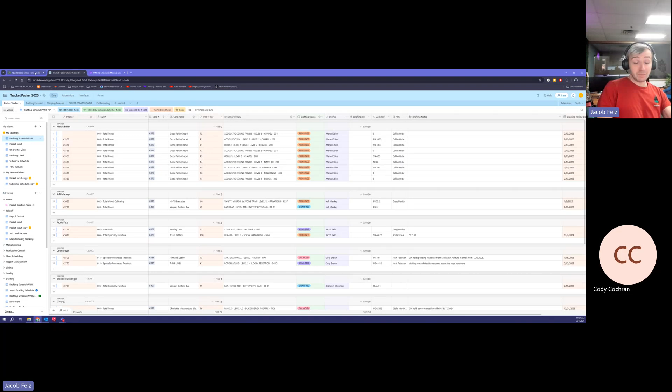All right. Well, I got some cool stuff that Greg was able to fish out of the metal vendor for the staircase, so we'll be looking at that in just a moment. If you want, because you are training, I would just go into indirect and say that you're training on stairs for today. I'm going to sign into the staircase since it's got my name on it. If it's in T sheets, I'll clock into it. It's 45719. Boom. Already done.

Oh, we're on stairs now. That's actually that thing you guys drew the other day, the faceted panel thing. You can't really tell because the picture's really zoomed in, but that's what that is. Bradley Law. Looks like a drawer. Yeah, those things actually did have drawers on one side of them, which is kind of cool.

All right. So this staircase is on level 19 of Bradley Law. Bradley Law is project 6358 if you did want to sync it for anything. We're going to take a look at the architecture. You said 6358? Yeah. I might already be synced. Oh yeah, you probably do have this one synced because I think you did some changes to it. 6358, Bradley Law.

Oh, 19th floor, that's right. Because you guys just did all the cabinets for that one, just earlier this week, believe it or not. Okay. So there's one thing that's a little bit wishy-washy at this point. There's a planter, they call it a plinth planter. It's got multiple names. Underneath the staircase, there is something there that is kind of undefined at this point.

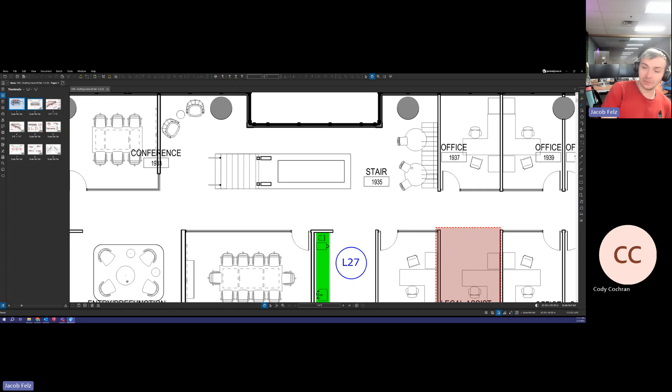And that's just kind of a necessary thing these days, which is kind of cool. It makes the stairs look even neater anyway if they have something like that. But it also serves a really good purpose too, to make sure that people don't get injured while walking through this building.

So the architect actually didn't really draw much of anything for that staircase, but fortunately, and this is something that typically we're going to do every time we draw a staircase, we will request the steel vendor's CAD drawings or their metal shop drawings for their construction of their stairs. Because when we do staircases, we very seldom actually do anything that we have to make structurally sound on our end. We usually are cladding some kind of a metal structure.

So I would say practically 100% of the time. There's one staircase we've done in the history of on-site that I'm aware of that wasn't like that, and we're still fighting it. It's a big deal. Dang. You've got to get it stamped by a structural engineer, which we kind of talked about the other day. It costs a lot of money to have somebody do that. Plus, it's a real pain. It has to be inspected. It has to meet a bunch of code.

So a lot of times when you see a staircase on a job, really what we're doing is we're essentially decorating the steel, if you want to call it that. We're cladding over what the steel vendor has provided. And that is the case in this staircase as well. So

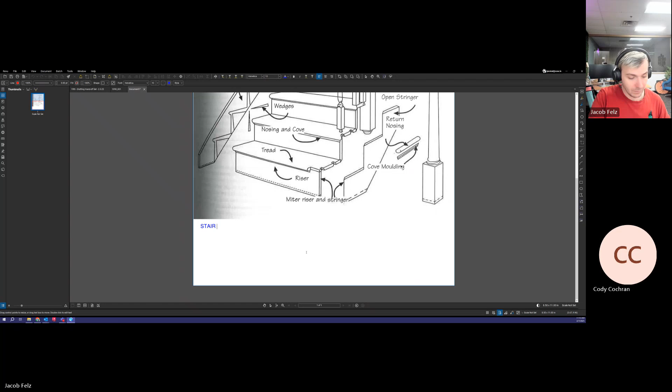Their terminology 101. All right. So, all right. Here we go. All right.

So the type of stairs that we're used to seeing, we do get a lot of the same types of verbiage. Like the side of your staircase, you usually will have what's called a stringer. A stringer is just a sort of diagonal member that actually goes along the side of the steps. Sometimes you might have one that's in the dead center too. So if you do, it's no big deal, but that would also be considered a stringer too. It would just be like a center stringer.

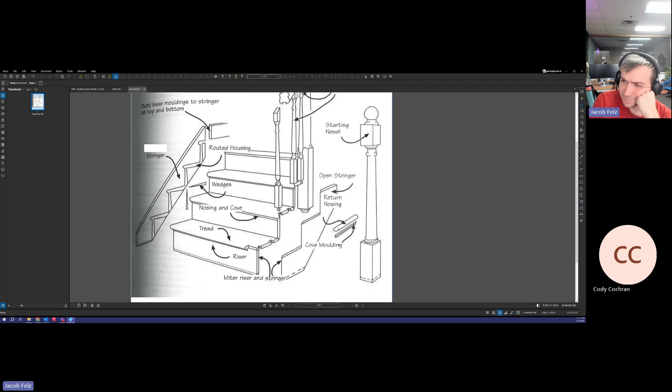So we usually don't deal with a lot of newel posts like this, but I have seen that on some drawings before. Had a staircase recently for a job called Print Temps that actually did have a couple of newel posts, but they were just a big cylinder. They weren't like anything fancy like this.

These are sometimes referred to as balusters, which would be like any vertical pieces that support the railing. We do sometimes see stuff like that. And in fact, the staircase that we have does have something similar to it, but it's made out of metal. And the handrail is also something that we're going to be talking about too. But the handrail on this staircase is by the metal vendor as well. So it's something that really isn't going to play a big part in our drawing.

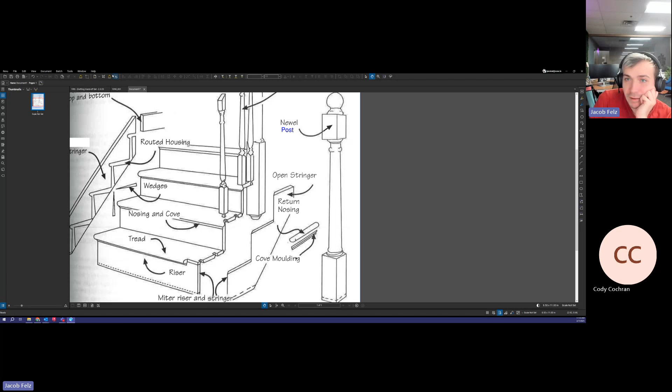But let's see, let's call this a newel post. There we go. Let's see. I erase that too. Let's call that a stringer. Okay. Miter riser and stringer. Yeah, we don't usually do that type of stuff. This is kind of more of like a residential staircase when we're looking at it, but a lot of the terminology does actually pertain to most staircases though too.

So a couple other things here too. The piece of the stair, well, okay, so let's start here. So vertical pieces of the steps will always be called risers. Horizontal pieces of your steps are always going to be called treads. So we got treads and risers, risers vertical, treads horizontal. And then at the front of your tread, there's something that's called the nosing.

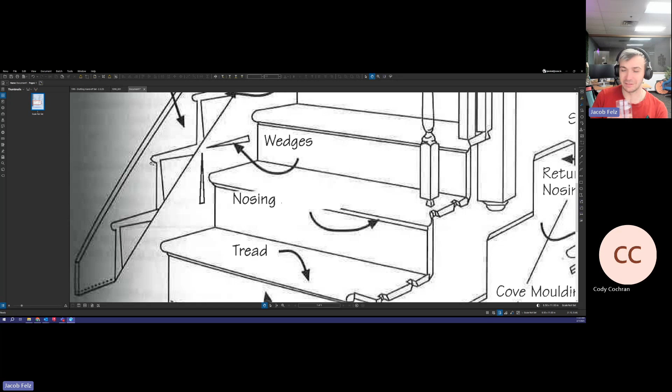Let me erase this and cove part because really we don't really refer to it as that. But you have your nosing at the front, which is the little piece that overhangs, which we'll get into that because you can kind of see it over here a little bit. Typically, that's about an inch of overhang on most staircases, and we'll be seeing something like that on the staircase we're building today too, I believe. So we're going to look at that here in just a moment.

Yeah, so terminology that's important for stairs. I guess you want to come into here. Let me erase some more of this stuff because this stuff doesn't really matter to us. This is, again, more residential than anything, and I don't want it to get too confusing. So I'll clean this up a little bit.

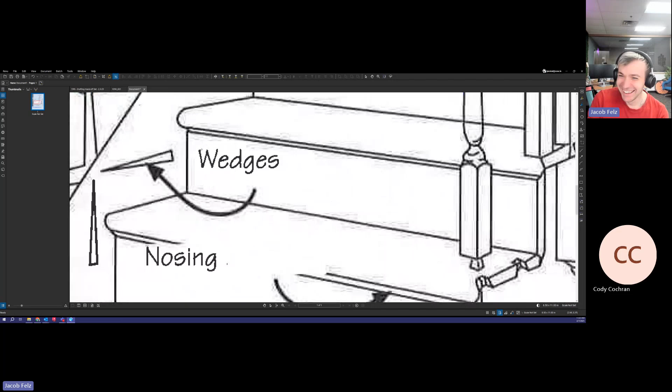I feel like I'm committing a fraud here by doctoring up a graphic from a textbook. No, it's only if you publish it that it's fraud. I'll publish it. Now, I think I'm not publishing anything here. I'm not rewriting the AWI book.

I'm just making it easier for what we need it for here today, because a lot of the stuff you see here is just not important to what we're dealing with. Okay, that's better. Again, this is kind of irrelevant as well, so I'm gonna knock that out of here. Not to be confusing. You don't need extra junk.

Probably should have done this before we got in the call, but Rod had an emergency thing he needed my help with, so I got that done for him real quick. All right.

We'll get rid of that note too, because a lot of times this won't be the case for what we do. The stringers are typically going to be actually made out of metal, and so we wouldn't be able to miter anything to that.

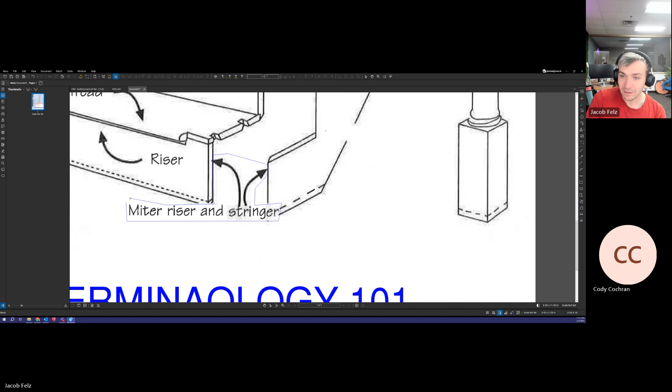I guess, yeah, whatever. We'll call it a newel post too, but all right. That's a lot better. Okay. Here we go. That's a lot easier to see what's going on.

So again, for staircases, the big things you're going to see all the time are going to be things like your handrail, which is pretty self-explanatory. That's just the handrail that goes along the staircase for people to hold on to as they're climbing the stairs. You've got your newel posts, which are typically going to be the main, big posts that are at the tops and bottoms and at the landings.

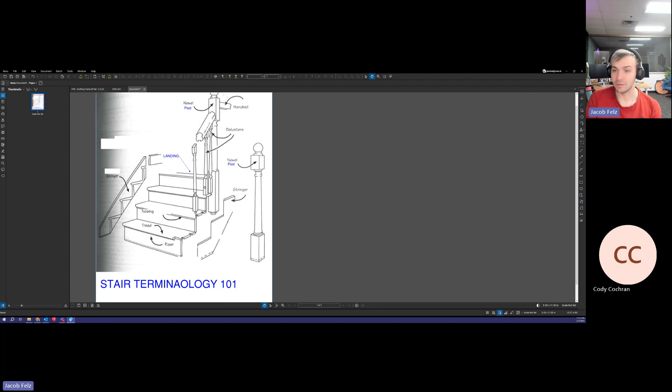Although it's not called out on here, one other thing that you're going to see is landings. Landings are just a larger flat portion of the staircase. You see them all the time on commercial staircases, and we'll definitely be seeing one here today. So then, along the sides of your stairs, you're going to see things called stringers. For your staircase, you're going to see risers for the verticals and treads for the horizontals. Below your tread, there's pretty much always going to be a nosing or an overhang.

And oh, I forgot about balusters. A lot of times we don't deal with that, but I left it on there in case we do see it sometime down the line. But what I'm going to do is flatten this. I'll save it over to our group chat for those that are in here today. And maybe I'll just take a screenshot of this so I can get a nice zoomed out version of it.

We're not going to have a quiz after this, are we, on these terminologies? Hey, I could totally make one up if you guys want. No. I could definitely do that for stairs. All right. I promise you I'll fail it. There's some stair terms right there. All right. Now, we should make it open book. It's open book. I have the book here. I don't know how that would really help, but all right. So we'll close out of that. It's not really important here.

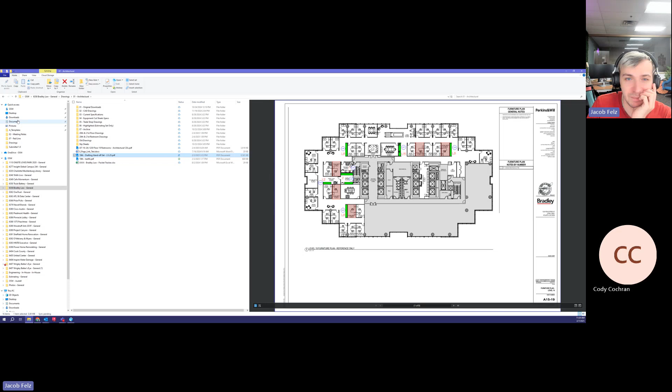So, all right. We'll go over some staircases that I've seen before. I've got pictures of some that we've done in the past, and then we'll get into the one we're working on today. Let's see, it'll be under my documents, backgrounds. Okay, let's dig in here. So the first staircase I have in my list is for a project called Accenture, and these pictures are a little bit small.

What's that, the coffee? Yeah.

All right. So anyway, this was for a project a long time ago called Accenture Phase 2. Oops, wrong screen. I was trying to pull over the photograph so you can see it. So these pictures are a little small. This one was an interesting staircase because it's not standard or typical, but you can see a lot of the same things that we just talked about.

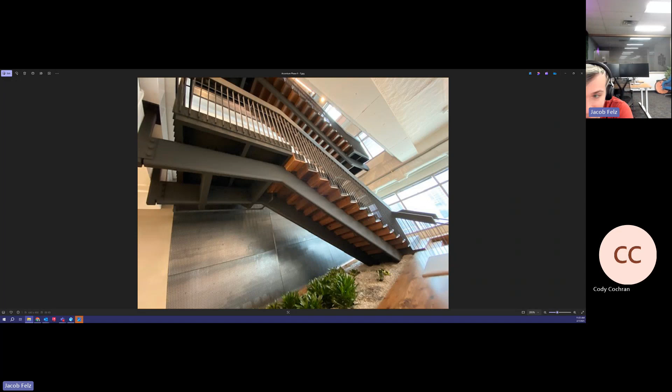So on this staircase, the actual treads and risers were made out of solid timbers, which I don't remember if they were truly recycled from railroads, but they may have been. I have to ask Caleb about that to see if he remembers. It's been a hot minute since I've looked at this one. I bet they weighed a ton. Oh, they sure did. Yeah, we had to have specialty hardware, I think, to make sure they weren't going anywhere because they weighed a lot.

Yeah, these are pretty cool. It's kind of like a railroad inspired office space that we did a while ago. But just like the one we're going to look at today, you can see that there's a planter and a little bench underneath for that same reason, just to make sure that nobody that has a seeing disability is able to accidentally walk into the metal stringer and hit their head or injure themselves.

Going up these stairs, these ones don't really have a nosing because they're just straight up beams. But there's a landing right here, which we couldn't really see in that graphic I sent to you guys. The landing would be this flat square portion where the stair goes up, turns, and goes up the other way. So there's actually two landings on this staircase. You can see this one has a small landing up here at the top, and then one about halfway down. Well, a little more than halfway down.

Got your balusters, which in this case were metal. It's pretty normal. Handrail, which actually goes and miters down, terminates at the floor. And then sometimes you'll see these too. A lot of times I'll refer to that as a guardrail instead of a handrail.

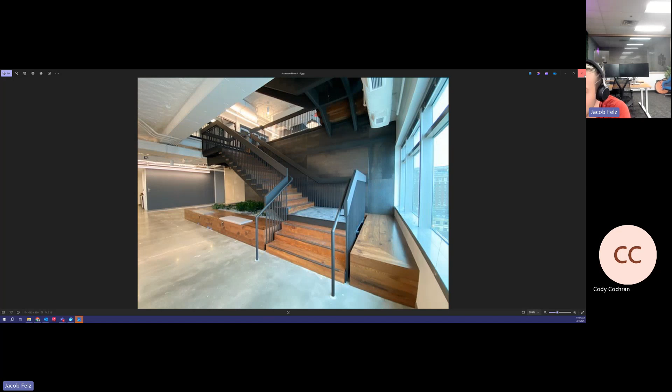So that's a staircase that we've done recently, well, in the last few years. Actually, it was quite a few more years back. The picture going up those stairs. All right, let's see what else we got. So moving down the list of pictures that I have here. A lot of them are circular stairs because a lot of those are very photogenic staircases, if you want to call them that.

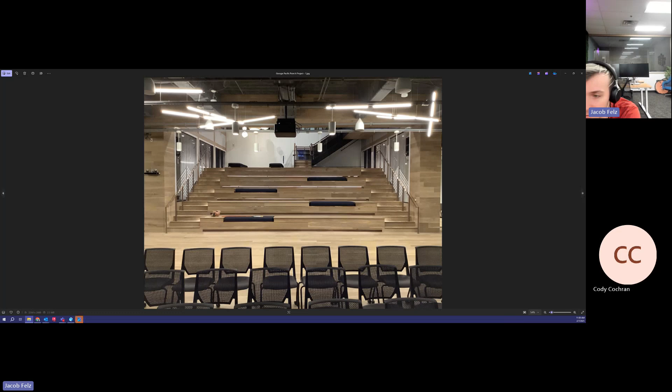We'll get into this too, but there's also something called stadium stairs or stadium seating. Usually built similar to how we would build a staircase. However, it is going to be made specifically for sitting on. So here's a good example of one here. There actually are stairs on the outsides. The middle is essentially just a bunch of benches here. All right, let's keep on moving. Is that one? Can't remember. I guess that was considered stadium stairs there too, but I'll skip over that one.

Everybody's all excited because the coffee's here. I would be too. I'm excited for y'all, even though I'm not there today. I can't drink any more coffee or my heart's gonna explode. Oh, that's just an urban myth. I'll be on 1,000 Ways to Die if I drink any more coffee today. You got to build up a tolerance. It's just like alcohol. Yeah, no, it's hard.

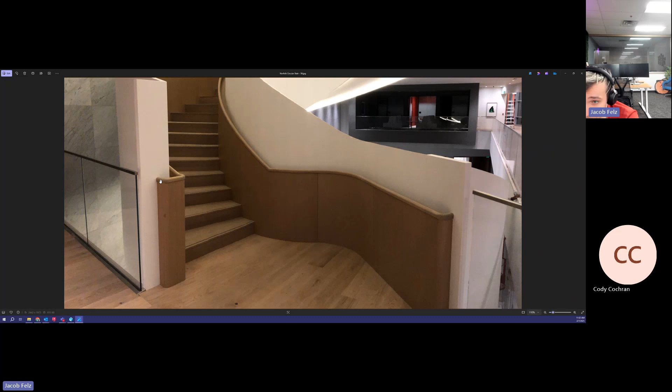Okay, here we go. So there's something wrong with these. I don't know if this is a panoramic picture or what, but don't mind the squiggliness of the steps. But on these stairs, we built all this wood portion of it. The veneer panels that are here, this handrail that's here, and the stairs, these treads, and the risers here. That was all part of our scope. Going up the stairs, there's a picture of going down.

There's a piece right here we didn't talk about yet. A lot of times they'll call that a transition strip or anti-slip insert. There's a lot of different names for it, but if you're looking at a staircase like this going down it, if you don't have anything that breaks your visual between the step and the next step, somebody might trip and fall. So they put these in as a visual to say, hey, there's a step here, kind of like when you see a yellow painted curb out in public. A lot of times it's made out of a grip paper, like sandpaper, so it grips your shoe to keep you from falling if you start to slip.

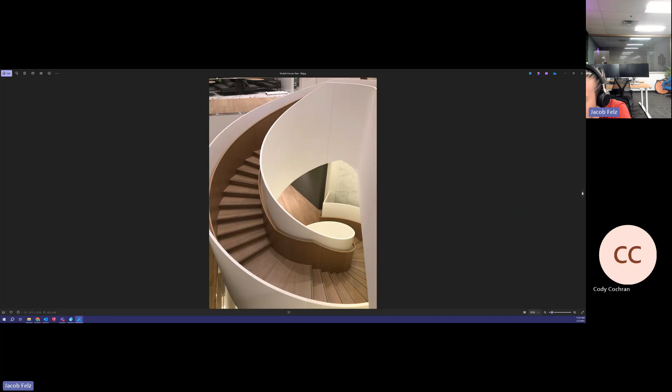Let me skip through these, so many pictures of that one. All right, let's see what other ones I got. I think I have some from Google too, somewhere.

What were you saying though? It just looked weird because from that last picture, it looked like - yeah, that one - like the stairs are unusable. They got you blocked in. Like, what's the point of the stairs?

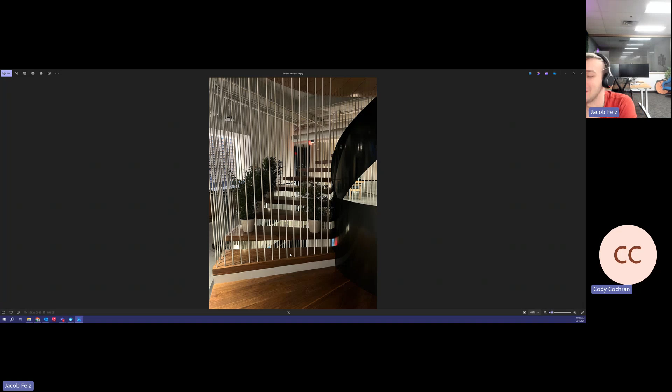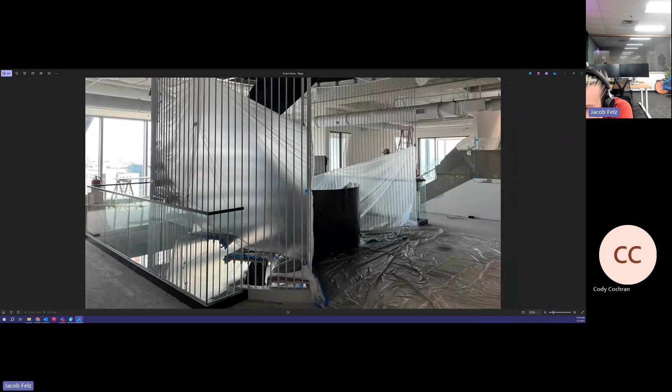Well, that's at the very top. They wanted it to look like it continued, even though this didn't go anywhere. It was like a staircase to nothing. So they had us build - oh, that's kind of cool, you can actually, I didn't notice that - you could see the side of the tread without that clipped-on piece. Anyways, they wanted this to be more of a visual thing, like an art piece, to look like the treads continued all the way up to the ceiling, even though there's nothing you'd be able to get to if you went up them. So they just barred them off like that. Kind of silly.

Now that one was weird because we had to get - we ended up getting a 3D scan of the building after the metal was installed, so that we could make sure these holes were lined up exactly where these tubes are going through, which was a real tedious process, but we got through that. That's something I don't know that we're ever going to have to do again, but it was an interesting case. We also had these panels on the ceiling too that followed the perimeter of the stairs.

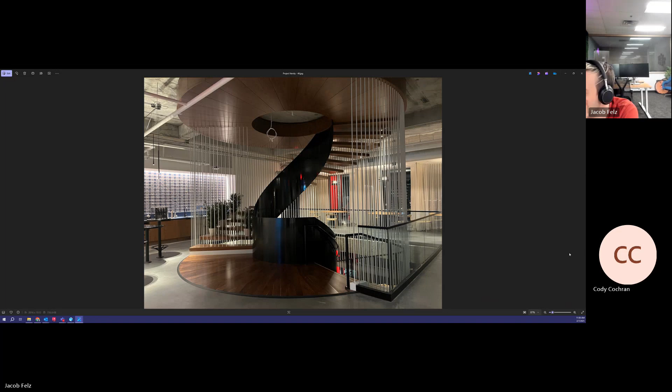All right, let's skip to the next, see what else we got. What else? If anything, that's on a staircase we built, so I'm not going to pull that up.

Yeah, well, I think that's about it. I got one more here if you want to look at it, but it's really not that crazy. This is for a project called SGR that we did.

Again, you got a landing right here, and below you got a couple of treads going up. This one didn't have any risers, kind of. The one we're drawing today isn't going to have risers either, so it'll be kind of weird, kind of like this one though.

And the stringers were actually set in a little bit. You can see them under the steps right there and right there. And then on the edge, instead of a stringer, what they did was have glass panes with these little standoff caps that held the glass onto the side of the tread. It's pretty cool, so if you look at it from the front, it almost looks like the treads are floating in a way. You can obviously see the stringer below it, but it's kind of a fun one, and it's almost like there's nothing there.

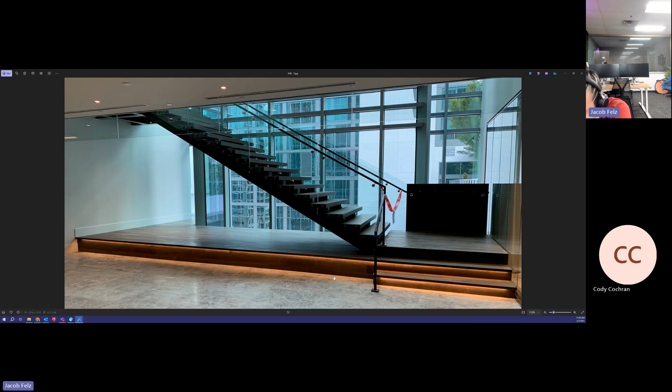Yeah, it's pretty sleek, and you got this platform below. Again, part of the ADA Act, so you got a cane detection guard, so somebody doesn't run into the side of the stairs.

That staircase we just did panels on, so I'm not going to really talk about that one. That's probably about it for what I have for stair photos. We can talk about these stairs we're dealing with today though. So, all right.

What we got? Aha, we got a Jordan. Sweet, welcome to the party, didn't miss a whole lot. Oh yeah dude, sorry about that, I didn't even see that message, I just saw it now. I was like, it's all good, wait, I have a message on Teams? I looked at it and I was like, oh, we're gonna go over some stuff later. I'm like, yeah, oh crap, you sent this at like 8 o'clock. I'm like, what am I doing?

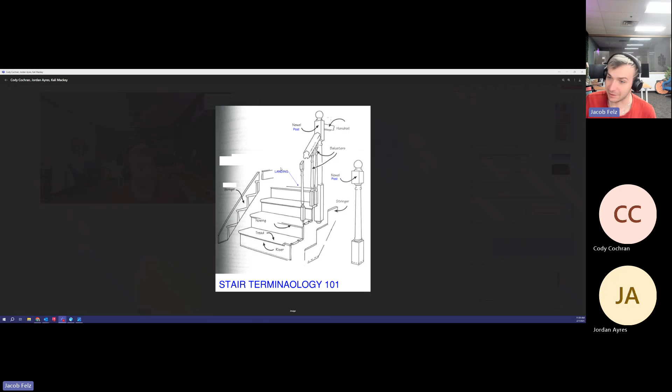You're all good, we didn't really go over a ton yet. I kind of scanned in a picture from this AWI book that I have here and doctored it up to show the different terminology you see on staircases all the time. That's all in the recording. We got the picture here in the chat. We're just kind of looking at some pictures of stairs we've done in the past, but I do have a staircase that's actually due sometime next week that we can look at together today, and I think we're going to try our best to get a good start on it today.

So that staircase is this guy. Might be a little crazy looking at first. I kind of briefly went over a little bit of it with Cody earlier. So this staircase has a little planter below it.

They usually will have a planter or a bench underneath, and that's more decorative, but it also serves a purpose for people with seeing disabilities. It prevents them from accidentally running into the side of the stairs if they have one of their walking canes or detector canes. That's why they exist, and a lot of times you will see those on stairs. As you draw them, you'll see them all the time.

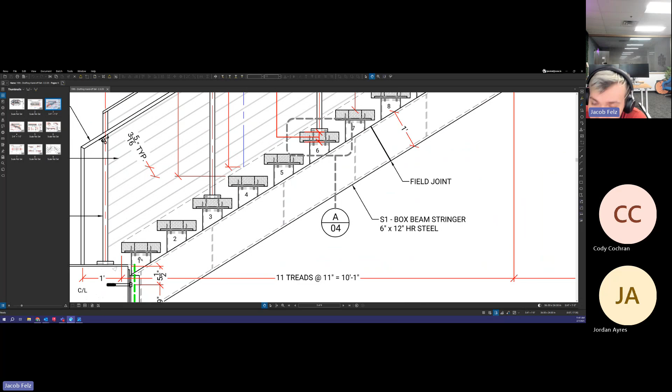But the staircase isn't super complicated, it is just a straight run. It does have what's called almost like a floating tread. So the steps, I mean they have steel in them, but they do kind of look like they're floating in a way because they're kind of going up here without anything underneath. There's no riser here, we're just seeing the treads there, and that's what they're going to look like.

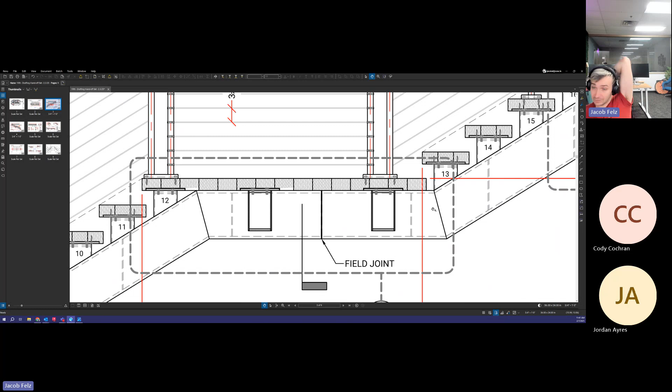Then there's these landings here. We did negotiate with the steel vendor because originally they only had like 3 little plates underneath of the staircase like this. We negotiated with the stair vendor, and they're going to actually put a full plate like this below, so that way we don't have to worry about our landing having to be structurally sound and support the weight of people standing on it, because if there's nothing in the middle here, that could end up being kind of like, I don't want to call it a liability, but it could be a problematic thing if something there ends up breaking or falling apart. So we negotiated to have more steel added in there just for that reason.

These stairs do have stringers below them. They're kind of set in on the sides a little bit. You can kind of see them right there and right there. That's these straight runs that go below. So, and again, they look like this. That's what they are, usually pretty heavy duty steel tube. So we have that there. Let's see what else we got.

There's a close-up of the landing and a close-up of the treads too, so you can kind of see what they're intending for them to look like.

What we're looking at here today, Jordan, is these are the metal vendor drawings for the staircase. A lot of times we'll actually request these ahead of time because we want to make sure we are coordinating with the metal vendor, because the metal vendor is a different subcontractor that works with the GC, the general contractor.

They're hired by them to build whatever the architect needs, just like we are. But an architect might draw a staircase without drawing it completely accurately. So we'll try to ask the metal vendor if they can send us what they have for their drawings, so we can make sure whatever we build matches what they're building. That's why we're looking at these here.

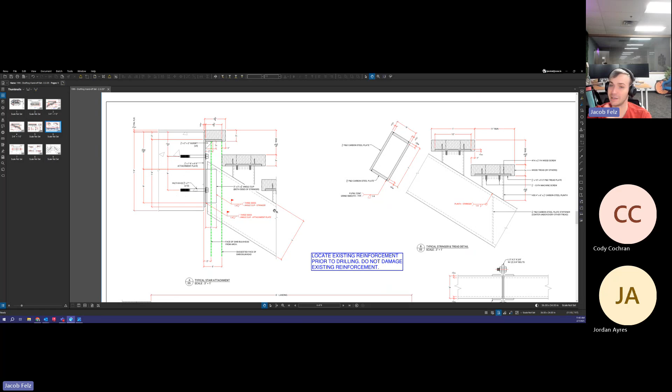They look a little bit crazy because they got weld symbols and a lot of other dimensions we're not used to seeing. But we're going to be able to use these to make sure our staircase is drawn accurately.

Let's see. The other thing that they did that was really neat, I'll pull it up here. They sent it over in an email, and I'll send the link as well. They sent it over yesterday. Where is it? Oh, right here. I'll copy this hyperlink over so you guys can see this and mess with it too.

I was playing with this right before I left yesterday because I was like, this is really cool. So the stair vendor, or the metal vendor doing the metal for the staircase, provided a link to a preview model viewer for their staircase, so you can see what this is going to look like.

You can actually zoom in and out on this thing. It's pretty neat. I don't know if I was able to hide any parts or anything like that, but oh, you can. How about that? That's cool. You can literally see how they're going to plan on building these, and it's going to actually help us with designing this too.

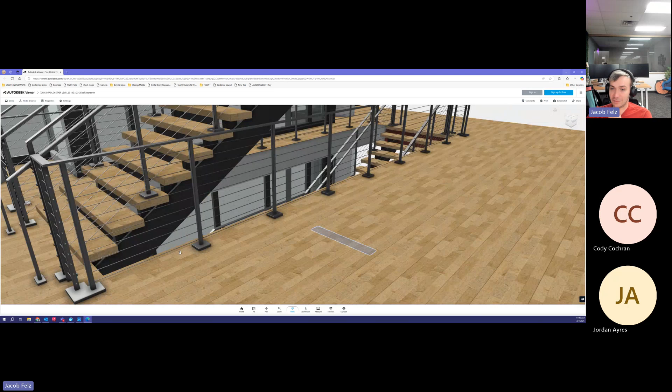Anyway, we usually don't get something like this. This is pretty high end, but it was kind of neat to be able to mess with this and see what they're doing.

But again, if I flip it around so I'm looking at the back of the stairs, you can see they have two stringers, one here and one here, and they follow the entire path going up the stairs. We got floating treads. Underneath those floating treads, there's a steel plate welded into the framing of the staircase, so that makes it all supported.

From our end, we're just putting these wood stairs over top of the metal, so they're already structurally sound. We just have to clad what they have provided.

They did leave the planter in this translucent layer because right now the planter is undefined from the architect, and we've been instructed to hold off on that part of it. So we can work on the stairs, but we have to come back to this later.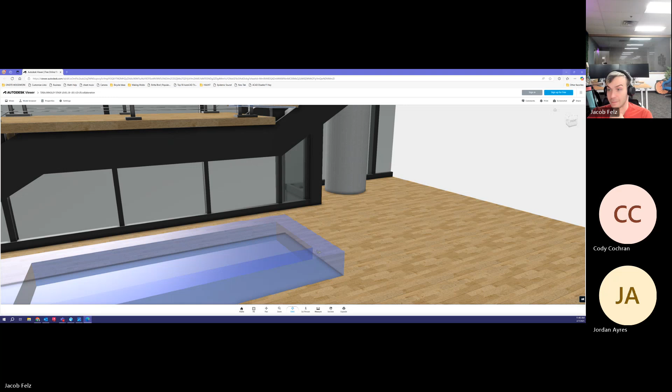For us today, we don't have any scope in regards to the handrail, the guardrail, or the balusters, or any of that stuff.

All that will be provided by the metal vendor as well. So really our scope of work for the staircase is going to be what we're doing to clad the treads and the landings, and I think that's it. Yeah, so that's about it. And then the planter, of course, too, but that's going to come later.

One thing to take note of too, I just noticed this as well, is that this planter is kind of built around the bottom of the staircase too. So although it's not clearly drawn in, this has to kind of mimic the stairs going down.

So for what we're going to draw, we're going to put a placeholder in there for that. We're not going to go into great detail for the planter just yet, but we can show like what they did and draw in a sort of model of what's going to be there, kind of like a basic shape. Then once we have more information, we can build off of that.

All right, I think we can get moving on this, but I'm also going to send their metal shop drawings to the chat here too, so you guys also have that to look at, the same thing that I'm looking at here.

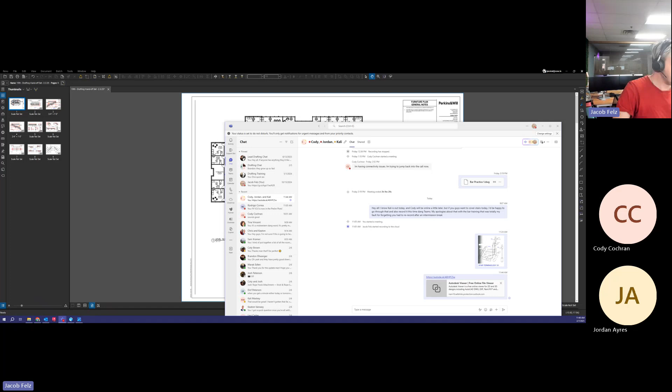And if you do want to sync this job, the project is 6358 Bradley Law. It is kind of an older project, but they just added the 19th floor into our scope. So, oh, okay, sorry, just making sure I didn't miss anything there. Okay, 19th floor drafting handoff set. Let me send that over real quick here to you guys. Boom. Okay. Here we go. All right.

So I was debating whether or not we need to 3D model the staircase, and realistically, we actually won't have to model this thing, but I kind of want to anyway, just so I could work with you guys more in 3D a little bit. So my plan is we're going to start by drawing in a tread, and we're going to make that tread into a block. And the reason we're going to do that is that if you turn your tread into a block, it will

allow you to, let's say you got red lines back later and you're looking at your section view through your tread, and they're like, okay, yeah, this looks really good, but we want to add in one of those transition strip things like this at the front of your stair tread. And it's kind of a lot of work if you have to add that into every single stair tread, because you're dealing with probably at least, I don't know if it tells you here.

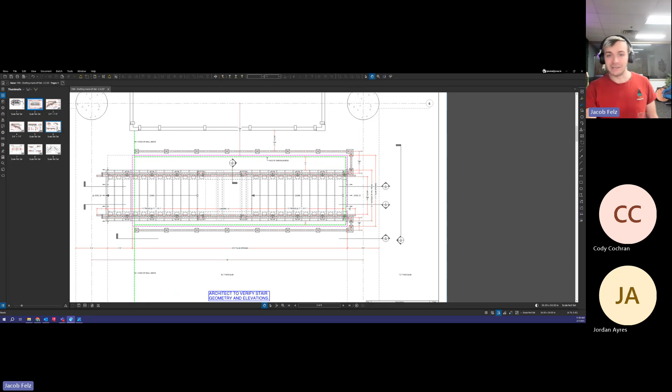Usually it tells you how many treads there are. Oh, it says 11 treads there plus another 11. So each floor is 22 treads. So any small change, even as small as adding a strip there, you'd have to add that to 22 different treads per floor. In this case, there's 2 floors, so that means we'd have to add it in 44 times, which is kind of a real pain in the butt.

So what we're going to do is turn our stair tread into a block, and that way, if a change happens like that, you will only have to update one stair tread, and it will update all 44 of them automatically. I'll show you how to do that. It's really not that hard, but when it comes to doing things that are repetitive like stairs, I really suggest we do that because it's going to save your life later. Well, in a way, save the time you have to spend spinning your wheels trying to correct or change anything on it.

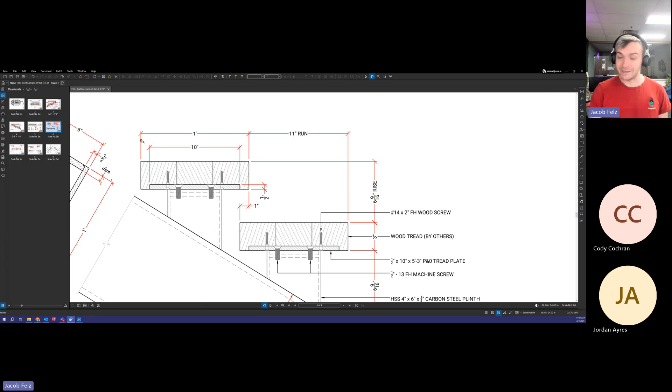So, all right. We do have some hold-to dimensions we've got to pay attention to on these stair treads. So before we even draw anything, let's look at that. Looks like the stair treads are 3 inches tall, and they want them to be 1 foot wide. So 3 inches tall, 1 foot wide. And if you look at the front, we talked about nosing earlier as being the overhang dimension between the stair treads. The staircase has a 1 inch overhang or 1 inch nosing here, meaning that visibly from the top you would see 11 inches, but really this would be 12 inches wide in total.

So, also something to look at too. I know these are drawn as solid beams. You usually won't build stairs that way. What we'll usually do is build them... Let's see. Trying to remember if I have any pictures of stair treads. I guarantee you I do. Let me see if I can find one real quick. Pictures of stair treads that we've built in the past, because I usually hang on to those and send them to our different training groups.

Ha, hilarious. A really old practice staircase that we did. Oh, nothing there. Okay.

Well, that's okay. I'll show you guys something I did earlier though. For this staircase, I kind of did Greg a favor to help us out later when we were getting to drawing this. I sent him a sketch of what I feel the treads should look like, and I can use that to go over this with you guys to show you the on-site standard construction for a stair tread. Let's see if I have any here. Where did I send that to him? Was it yesterday? No, I think it might have been last week.

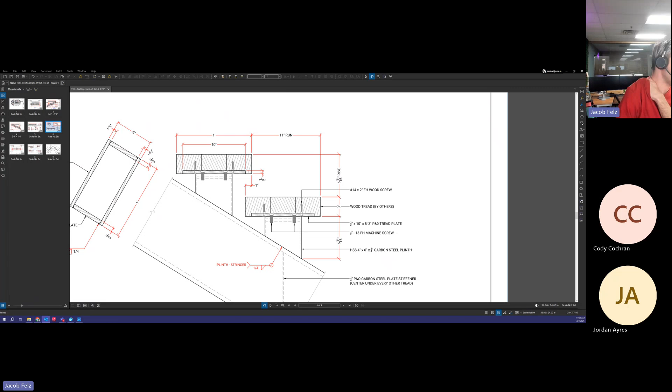Here we go. Okay, so I kind of made this drawing for him, which is just a single page, just kind of detailing out what the stairs would look like.

Now, almost all the time, you're going to make your stairs out of solid wood. We do solid wood on stairs because it's just more durable. You wouldn't want to do veneer or laminate on a staircase because it's just not going to hold up. So staircases, we have to make them out of solid almost 100% of the time. I don't know if there's ever been a time where we haven't, but it's a really good idea to make sure we make it out of solid.

So the way that we do that is we will make what's called engineered solid. Engineered solid for us means that the solid material will be 1/4 of an inch thick, so you can see that noted here, and it will be glued to a 1/2 inch thick layer of plywood substrate.

Why that's really important is because solid will eventually warp with the changes in humidity in whatever environment it's in, whether it's in a building or wherever. Solid will warp over time, and that's just a given. So to try to minimize that, we press that 1/4 inch of solid and glue it to a 1/2 inch of plywood.

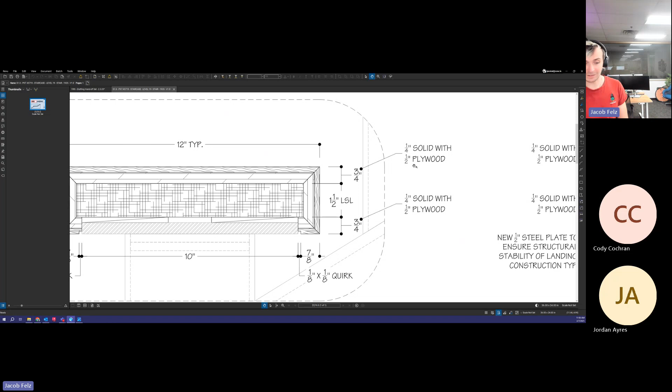And that 1/2 inch of plywood is really critical because it holds the solid taut, so it's not going to warp. If we were to do 1/4 inch solid with 1/4 inch plywood, it may hold up, but what's probably going to happen is as that material sits in that office space, over time it's going to start to want to warp because it's not balanced enough. The 1/2 inch of plywood with the 1/4 inch of solid provides enough balance to keep that from warping, whereas anything less is probably going to end up warping.

So it's something that on-site has boiled down to almost a science, so we try not to mess with it. We will always try to use a 1/2 inch of plywood with that 1/4 inch of solid at the top, and it's due to keeping it from wanting to warp over time. So really important. That's why that's drawn in like this versus what was drawn here, where the entire thing was made out of solid wood.

Now, that doesn't mean you can't make the entire thing out of solid. I showed Cody an example of a staircase we did that was made out of completely solid wood. But those were solid timbers, which is definitely less likely to warp because those things are massive. But anyways,

generally you're going to see something that looks like this when it comes to stairs. Now, an architect's not going to draw it that way. So what we have to do is take the general shape, like that 12-inch wide by 3-inch tall stair tread, and then build off of that shape that they asked us to provide. So that's what we've done here.

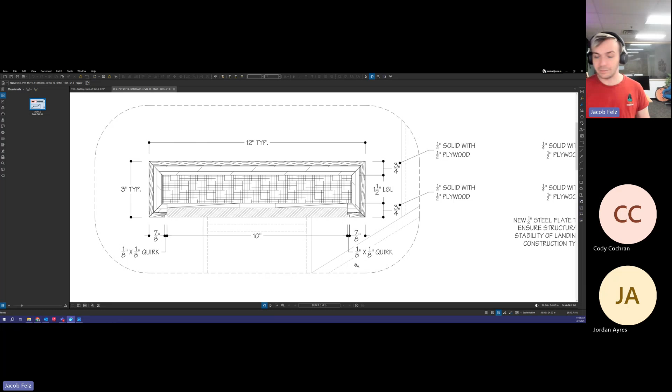If you notice below the staircase too, one thing that I've done here to help us with installing this is that I put a little 1/8 by 1/8 quirk that sits here right between the solid and the steel plate by the steel vendor. And that's intended so that way we don't have to make sure that this lines up perfect with that. The solid doesn't have to be completely snug to the side of that metal.

Because if we wanted to make it completely flush, again, over time, even though we do have it as engineered solid where it's going to have less likelihood of warping, any slight amount of change is going to be pretty noticeable. So even if it's as minimal as 1/16 of an inch or 1/32 of an inch, you'd probably be able to see that this is not in line with that. So we break up the visual line of sight by putting in that 1/8 by 1/8 quirk here. That way, if this moves at all for any reason, you're not going to be able to really tell.

It also makes it easier for us too, because then the installers don't have to fight with making sure everything's lined up so much, because they would have to spend all day out there putting these treads in and it would just take them forever. So it's helping them as well, but also making it more aesthetically pleasing to look at, where it's not going to have things that look like mistakes on it. So that quirk's intentional for that reason.

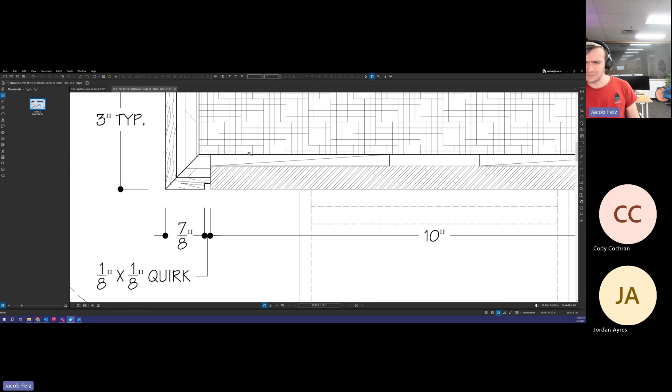You can see there's a little bit of shim space here. A lot of times on stairs, I've talked to Trevor about this, who is our install guy right now, and one thing that he usually will ask for us to provide is about 1/2 inch of shim space, and I think this staircase is a little bit less than that. I think it's like 3/8 or maybe 1/4 of an inch, which should still be okay. The important thing is you usually do want to have some kind of shim space built in.

Not that you can't trust the steel vendor to build their stuff to the exact size or the exact height. You want to make sure that if there is something that's not quite right with their stair or their metal, it doesn't affect the way our stairs are built, the stuff we're putting over the top of the steel. So we will put in shim space intentionally because it will allow us to either raise or lower our stair tread to correct any mistakes that are in the steel. So also really important too.

So shim space below or within this inside of your tread, if you can get it in there. Usually we try to aim for about a half an inch, but sometimes we'll go as far down as a quarter, and that usually makes it okay too. But you don't want to try to build a staircase without shim space because it could result in things not lining up just right. So again, this one's a little weird because it does have a lot of space inside of it.

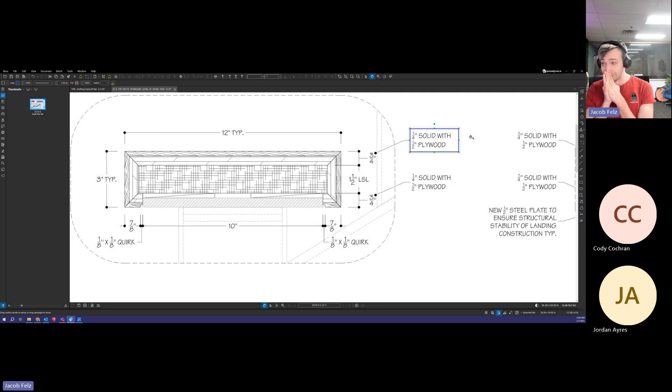We have a 1.5 inch block of LSL in the middle, 1/4 inch of shim space below that, then you have your steel plate by your steel vendor. So really, the main thing for you guys to take away from this is when you draw a staircase, if they show it as a completely solid piece of material, just make sure that we are replacing that solid material with that 1/4 inch of solid and 1/2 inch plywood type of engineered lumber. That way things don't warp and get crazy out there in the field.

All right, over here, similar to that, this here is a section through the landing.

So the landing is made the exact same way as the treads. The only difference in this though is that it's a lot larger. So it's a lot wider here. We got 73 inches total. I put a break line in the middle here so you could see how I was able to separate that and get it to fit on the paper.

But if I go down to the full view down here, and if I go back to that model, I can show you something here. So originally, the metal vendor had provided these 3 grade out boxes here to support the landing. And we came back and told them, hey, we're not comfortable with just having those 3 points of contact to support the weight of this and to support the weight of people walking on it. So they went back and they agreed that they would put in a flat plate of material that goes from the front to the back of the tread right there.

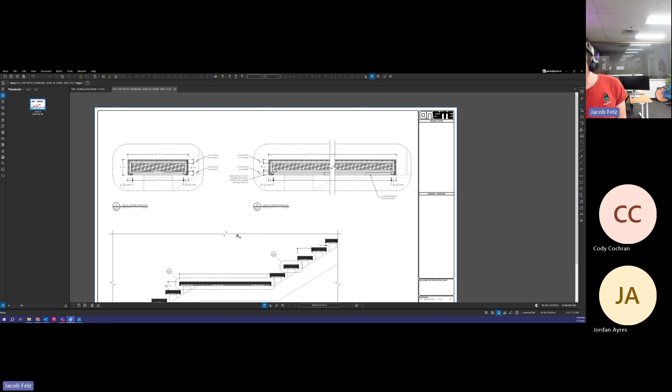Other than that, the construction of the top part of this does not change. That all stays exactly the same as the treads, but below the landing, there are 3 portions here that are hatched with MDF. And those portions are actually going to be veneer panels here. The veneer will be to match the solid. So hopefully it won't be that noticeably different. Although the difference between solid and veneer is somewhat noticeable, we're going to try to get by with just using veneer below because this plate is a 1/2 inch thick.

And going back to what we just talked about for the tread construction, when you're dealing with something that's a 1/2 inch thick, if you try to make that a solid, you would only have a 1/4 inch of solid with a 1/4 inch of a backer or plywood substrate, which could end up warping over time. So we're going to try to sell them on the idea that these need to be veneer if they want to make them a 1/2 inch thick. So that's why we're using veneer there versus solid. Again, that's really just to prevent it from warping. So that's hopefully going to keep that from happening.

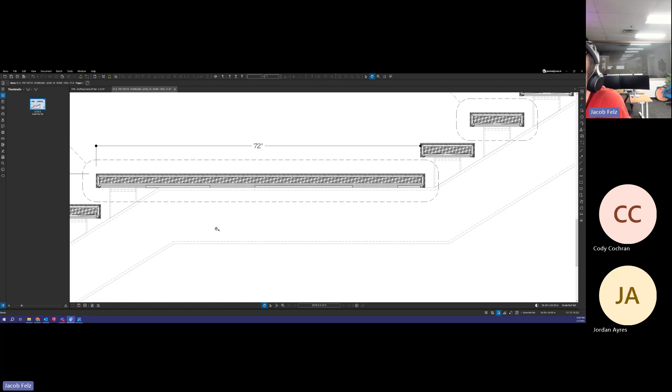I guess one thing I didn't do, which we are going to have to do on our drawing, is I just noticed I did not provide a quirk like this between the steel and the panel. We're going to definitely want to put one of those in. So I'm going to sketch it in here, almost like a correction for my own self to remember to do this later. Come on, there we go. Well, actually, that one can stay like it is because it's butting into our own material. So there's already a quirk there. We don't need to add another one to it. But anywhere there's a change between metal to our scope, I'm going to put one of those in just to make sure that this does not have to line up perfect with the steel.

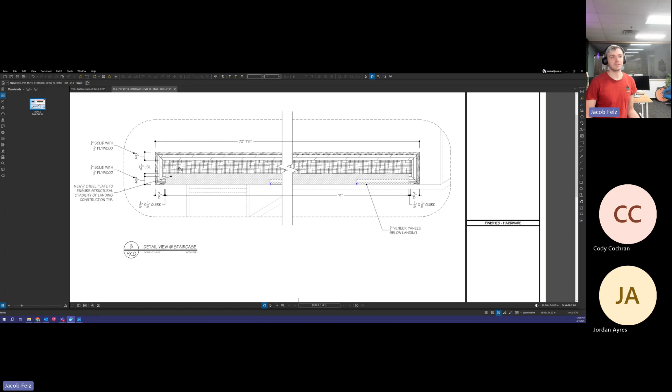All right. You guys got any questions or anything so far? I'm throwing a lot at you guys right now, so let me know if you do. Okay, cool. All right. Whew. Well, I'm gonna keep on moving then. So, let's see.

Well, we can get into drawing our stairs, I guess. So we'll go into AutoCAD. We'll pull up the Bradley Law drafting template and then get to working on that.

Oh my gosh. Geez, that took forever. I realize I'm on a phone call, but surprised that AutoCAD took that long. Bradley Law. Here we go. Oops, I accidentally saved this in the template. That was my bad. All right. Delete that.

Okay. So I'm going to leave this alone down here. It can be a template for us to work off of, but we've kind of already gone over the details of how we're going to build that. So if anything else, we can use it as a way to double check our work, to make sure that we're matching up with what we've already presented to them as how we're going to try to build it.

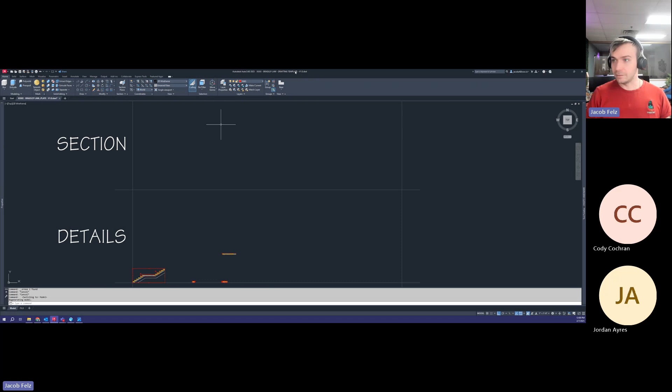So let's go, just like we have been doing. Actually, hold on. We'll split screen this a little bit. Try to make it so you can see both my AutoCAD and my Bluebeam here so you can see what's going on both screens. Okay. So what?

All right. So let's look at our, make this full screen just for a sec. Let's look at our top-down view here. I just want to see some things before we get going. Mostly what I'm focused in on is I'm looking for my standard dimensions for each tread.

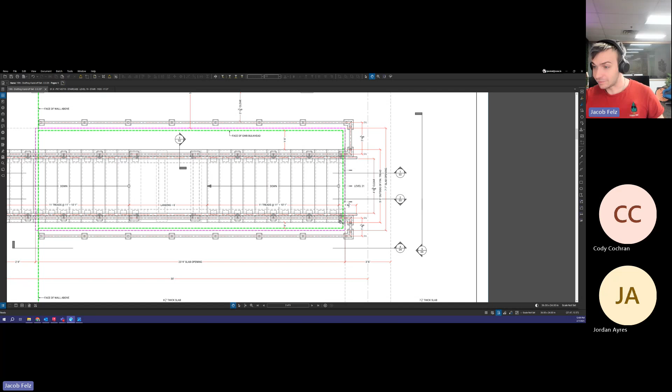So we do know that a tread is going to be 12 inches deep and 3 inches thick, but we also need to know how wide it is from edge to edge. And a lot of times these metal drawings and the architectural should show it. Now, the architect really didn't draw these stairs, so we're just pretty much going blindly based on the metal shop drawing here. So we have a dimension here. It looks like 5'5" from outside of finished tread to outside of finished tread. So that'd be 65 inches wide for each tread.

That should actually apply to both sets of stairs because we are dealing with two different floors here. We have, I think, this goes from 19 to 20 and then from 20 to 21. So fortunately, they're both going to be almost like copy paste of each other. So really we're drawing one staircase, we're kind of building two with one. So killing two birds with one stone, one stair. All right. So 65 inches wide, 12 inches deep, 3 inches thick. I got to remember those three numbers. So let's go back to AutoCAD.

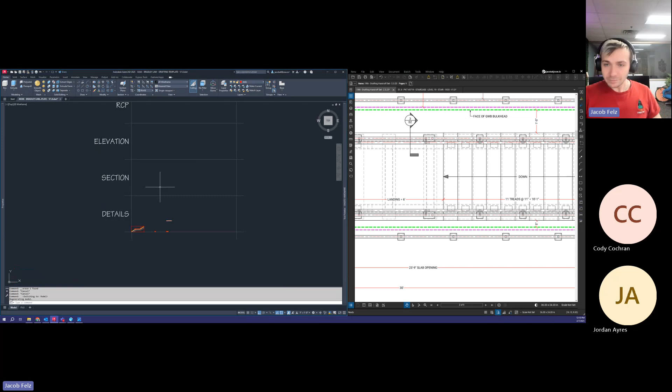Okay. And because I've already got this drawn in, what I'm going to do is I'll copy this tread and the steel plate too, because why not? We're going to copy that over to the side, over where our 3D model lives. We're going to paste that there. Now, before we go any further, we do want to make sure that, one, we get rid of all the hatching that's in here, and then two, that all of these polylines that are in here, we got to make sure they are polylines first, and then we got to make sure that they are closed as well.

So just like we have been doing, we're going to highlight all of that. We're going to go into our properties menu. If you don't have that pulled up, you can just type in properties, or I think, Cody, you've been doing it a different way too, which I thought was kind of cool. If you right click and then go to properties, it'll pull it up as well. Now, one thing you can do is when you're in properties, you can go over to this quick select option here, which will allow you to change what you have selected currently to eliminate things you do not want to delete or vice versa.

So we're going to open up quick select. We're going to go in here. We're going to tell it that we only want to select hatches. So we're going to say object type hatch. And then instead of selecting one of these, we're going to say operator equals select all. So if we do that, doesn't matter what type of hatch, what layer it's on, it will select anything that is considered a hatch. And then just make sure that include in new selection set is checked here, and then you can hit OK.

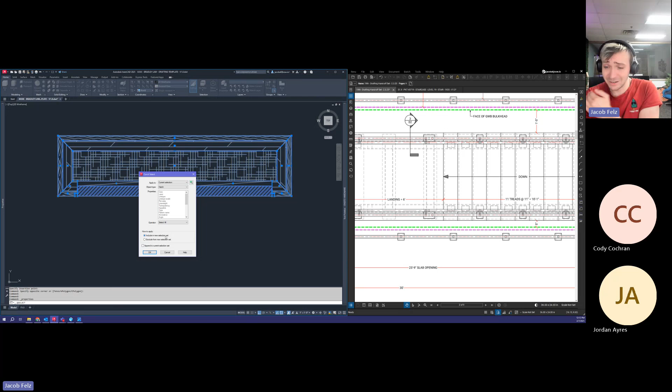Okay, so once you have that, just delete the hatching there. These, you can technically get rid of that too. That's that line that just says this is the shim, a shim between the metal and the LSL that's inside of the tread. And then the last thing we're going to do is go through here. I noticed that, oh, maybe we got rid of it. Okay, so we are only selecting polylines at this point, and if we look down to miscellaneous here, it says that all polylines are closed. If there was one in there that wasn't, it would probably say varies for this. And then you'd have to locate which one isn't closed, and then either do a BPOLY on that polyline or join to make sure that it's all actually closed.

So anyways, from there, once you have confirmed that everything is a polyline and that every polyline is closed, you are good to then actually start making this in 3D. All right.

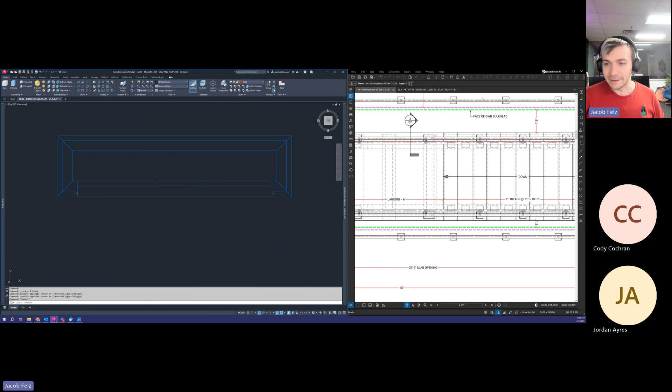Here we go. So a couple ways you can do this, we've talked about before. You can use the press pull command and highlight each part you want to create a 3D object off of. You can also use the extrude command to do the same thing. Extrude lets you highlight everything and make 3D objects off of that. I think the difference is extrude will delete your polylines after you've extruded.

So you want to make sure that if you do need this for any reason, you make a copy of it. Let's see, what else can we do? Well, we'll use the extrude method because that is definitely the quickest way to do this. So let's click on extrude, highlight all our lines, and hit enter.

And then we're going to tell it this needs to be 65 inches to match this tread here. All right, so 3D rotate. Okay, so we should have one tread. Ta-da!

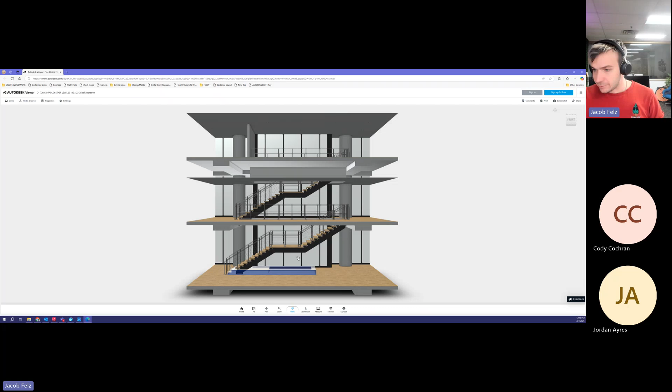Okay, just going back to this. Okay, so yeah, it looks like we're going to have to cap these off. Looking at the side of it. Come on, zoom out. Okay, there we go.

Looking at the side of it, you can see that there is solid on the outside edge of it. So we're going to be finding a way to cap this off in our model too. So let's go back here.

Okay, so for us to do that, we need to use the same method of approach. We do need a 1/2 inch of plywood with a 1/4 inch of solid on top of it. So that totals out to be 3/4 thick.

So what we can do is, let's see, well first off we can press pull these objects in. Let's see, not necessarily that, but the LSL and the shim do need to come in 3/4 of an inch. So 0.75 this way. We got to do that on that side and the side here.

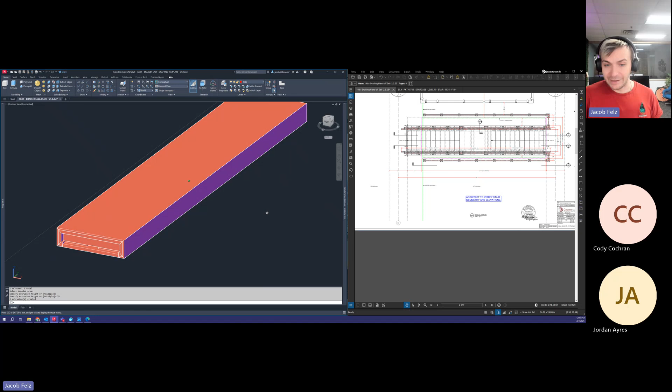So again, press pull, hold down my shift key so I can select multiple objects. And I'm going to shrink this in 0.75. Okay.

Then I need to figure out, because that's my steel plate right there, I'll make that the gray color so you can see the difference. So that's my steel plate. I need to find out on the steel vendor's shop drawings how wide that steel actually is, and I'm hoping that they have it noted somewhere. It should be on here somewhere, just got to locate that.

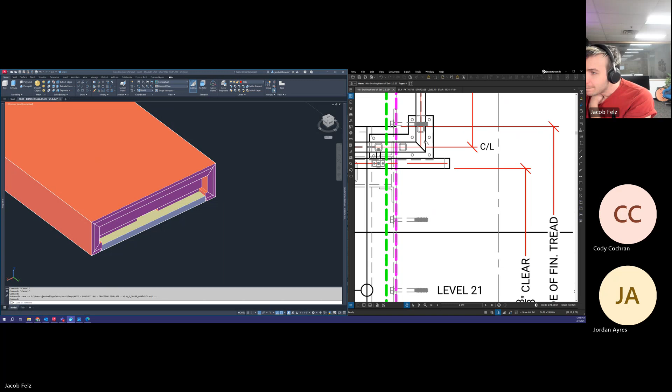Nothing there. I wonder if you can scale things off of that model they provided. If it's not shown here, I'm going to try that and see what happens. Yeah, it might do that. I'm going to give it a shot. Let's go back to that and see what we can do.

Oops, wrong thing. Let's go, here we go. So let's see what options we got for measurements, because maybe there's a way to do it here. And what I could probably also do is isolate. Come on, let's see. See if I can isolate one steel plate.

Well, you can do first person too. Hold on, I gotta see this. Whoa, okay, never mind. Let's not do that. I'm gonna reopen that link. I broke something in there earlier trying to maneuver around their model.

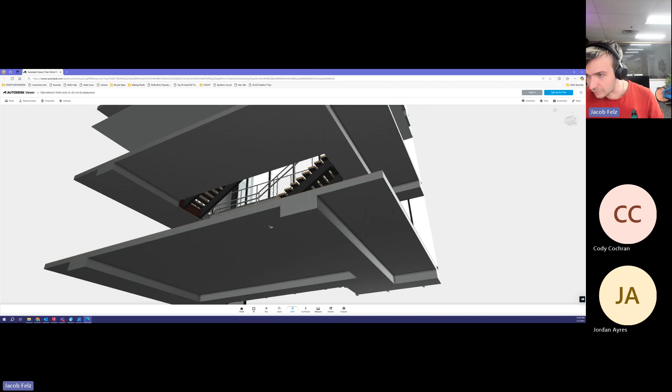Okay, let's see if we can get to one of these plates. Isolate, that's what I'm talking about. All right, now let's try to measure this thing and see what we can do.

From there. 2. There, what does it give me? 63 inches. Cool, awesome. I guess while we're doing this too, let's measure the depth of it too.

So we got the width at 63. And whoa, the zoom is backwards from what I'm used to. So 63 by 10. I'm going to write that one down on a sticky note because it's going to be really important that we get back to that.

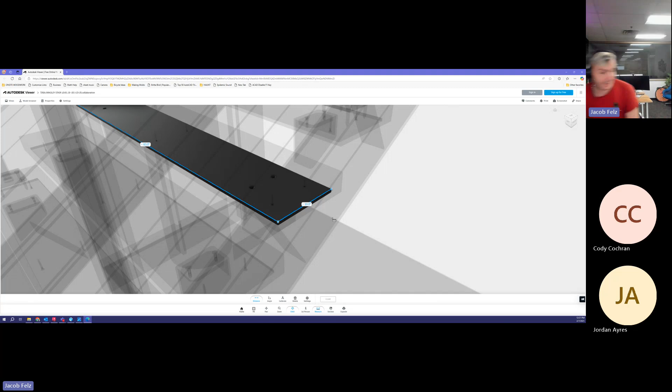There we go. 63 by 10. All right, let's go back to our model. There we go. So let's isolate our steel plate. So it should be at 10 inches already because that's what we based it off of from their model. But we need to make sure that this is 63. And right now it's probably at 65. So we need to bring it in an inch from either side to get that to work.

So let's presspull the steel in 1 inch and come over here and presspull the side in 1 inch. Unhide. All right, cool. Cool beans. Okay, and let me just check one little thing here real quick. All right, awesome. Okay, this is gonna work out really, really nice. Okay. Yeah, we should be okay.

All right, I'm actually gonna move these in. Sorry, I should have moved it in an inch instead of 3/4. And that way, these can be in line with that steel plate. That is the LSL, the shim space. And there we go. All right.

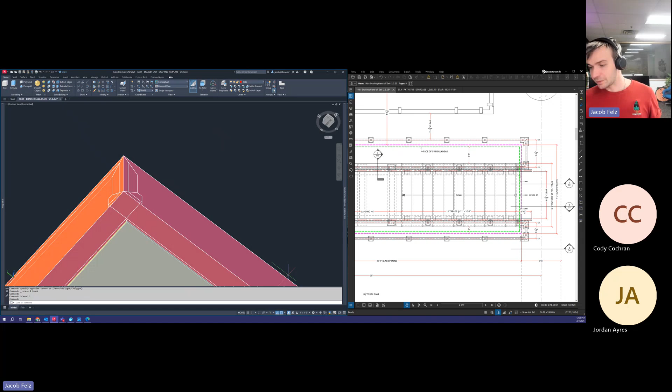I'll do this one a little different so I could go back over one little thing with you guys. So if you have to miter something and you don't want to do that apparent intersection method, the other thing you can do is, being that we are dealing with something that's kind of square and lined up where it needs to be, we can go down here to this polar tracking option, and we can tell it that we want to snap to 45-degree angles, which if we do that and we turn that on, now if we go to slice,

highlight those same parts that we just highlighted on the other corner. Okay, and then click on my corner. Now what I can do is, if I move my cursor around, you can actually see that it snaps to these 45-degree angles. So just like that, that would be fine. I can click there, tell it both sides again, highlight that corner with this blue selection box, which you can get to by clicking and going from left to right.

If you go right to left, it'll highlight every part that touches it. But if you go left to right, it's going to only highlight the parts that are inside of that box. So I'm using that as a way to get to only these parts that I need to get rid of here. So we'll delete that. And then we need to get this here to match up with this here. So I'm going to isolate just those parts so that I'm not dealing with all the extra junk. And I'm going to use the slice command here to highlight those two parts.

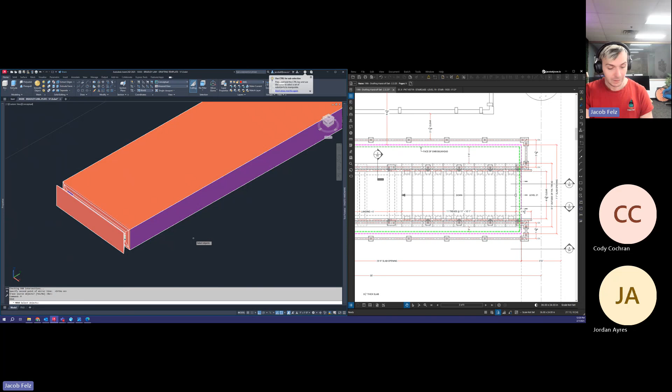Come on. Oh wait, I gotta select all of these real quick here. There we go.

All right, now we got to clean up these corners again, just like we did earlier. The good thing is we only have to clean up the corners that deal with the front and the back this time, because we've already cleaned up the outside edge of this thing.

So we're just going to slice these real quick, from there to there, keep both sides, back out, highlight those, delete those parts. Go again, slice, only needing to do a 2-point here, so that's going to save us some time. We're going to go from here to there, keep both sides, whoops, and then remove those parts.

And then just like before, I need to highlight those parts from the top of the tread to the side, and we're going to miter those together too. These are the ones we have to do that 3-point again, because we're not cutting it from the top down view, we're cutting it from the left-hand side this time and going straight back.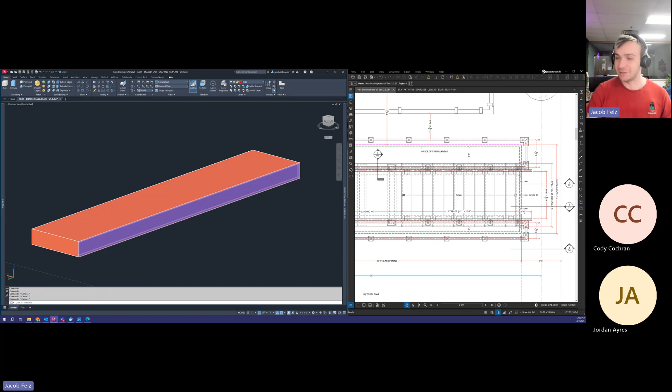But we do need to make sure that these layers are correct too, because right now my tread is all built on the rib layer, which isn't really correct. So I need to make sure I'm putting everything on the actual layers they belong to. Going back to layer properties, I'm going to switch over to 3D. For the top of my tread, the front, the back, all that has to be on the solid layer, so we're going to take all of those and put those on the correct layer, including that guy too, that little lip at the bottom. That will also be solid as well.

Okay, and then we have a layer behind that, that would be our 1/2-inch plywood substrate that we talked about earlier. We need to highlight all those parts and get those on the correct layer as well.

And if your computer fan is not spinning up right now, you're doing it wrong. Just kidding, my computer fan has definitely been spinning all day though. I think it's getting towards the end of its lifespan.

I'm gonna make a layer here. Did a lot of that this past week, haven't we? Yeah, I'm sure you guys have. I'm gonna make a layer here for shim and a layer here for LSL too. That way I don't have to use the plywood layer for the LSL or the shim, it could have its own designated layer. If you want to make layers for yourself, you can, I'm not going to tell you not to.

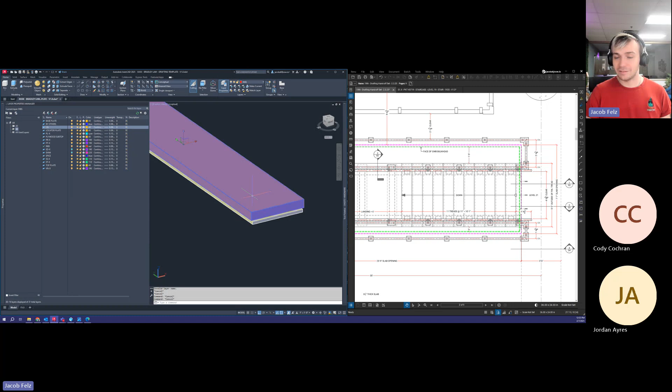Okay, so that layer's turned off, so those parts disappeared. Okay, cool. But now I've got to make another layer for my LSL. Probably take this base plate, label it LSL. Okay, apparently not. LSL. All right, sometimes it does give me problems when I make a new layer, but I went around it.

So, all right, cool. Bring everything back, go into my 2D wireframe now. Should be able to see all the pretty colors of what we've got going on here. Yeah, so you can see that I have my solid wood. I've got my plywood behind that. Got my metal in there in the gray layer, my shims in pink. And that just about does it.

So at this point, once you have a tread completely done and you are confident that there's nothing wrong with it, you want to double check your dimensions, make sure that everything still adds up to what it needs to be. So 12 inches that way. We should be at 65 inches this way. And we need to be at 3 inches tall. So as long as all 3 of those dimensions are good and you've modeled everything else the way you needed to, we can go into the block editor next.

So this block is not going to have any function to it other than just grouping everything together. Now the difference between using the group, because there is a group command, the difference between using a group command and a block command is that if you group this together, it appears to have the same function as a block. But if I change anything on this object, it's not going to change anything on this object.

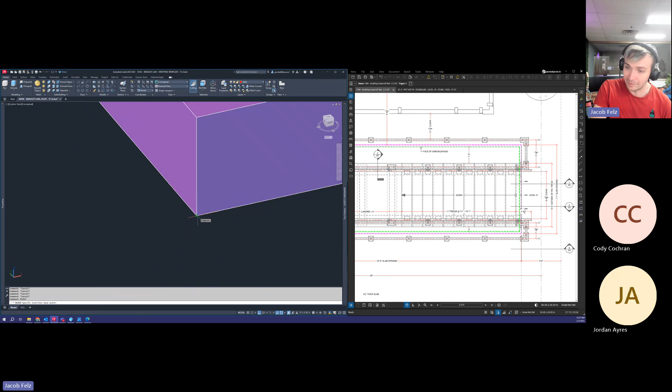And then down here it says pick point. So what that is, that is the base point for your tread. So you don't really need to pick one. I do like to put one on there anyway, just because I like having one set up for me. So I'm going to pick this corner at the bottom as my base point. And then you have this little green icon for select objects. If you click on that, highlight your tread, hit enter, it'll bring you back to this little menu.

And now you can actually see the little picture of your block. And there's nothing else in here that you need to change for this to work. So you do want it to be explodable in case you ever need to do that. So you want to say allow exploding. But that's already on by default, so you shouldn't have to change that. All right, so we're going to hit OK.

And now if I click on this, and let's say I needed to hide something. Let's say I wanted to hide the top of my tread. I can't actually do that anymore, which is kind of goofy, but you can do some other stuff though. You can still turn off layers and it still works the same that way. But this is kind of like a group now at this point. So now that it's there, it's a block named tread.

We don't want to manipulate it anymore unless we have to. If we have to edit it for any reason, you can double click on it and hit OK, and it'll open up your block editor. Yours will look like a gray background by default. I had recently changed mine to black because I realized the existing layer, that gray layer that's there, is almost the exact same color as the default background.

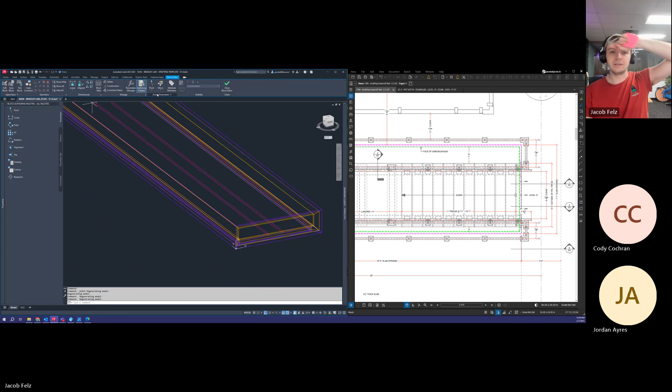You also have a special menu that pops up at the top that has more block tools up there as well. So usually don't really mess with this too much, but there are some things up there that we have to mess with later. When we get into blocks, we'll talk more about that. Anyway, if you have to edit your tread, you can do it in the block editor. And when you're done, you hit this green checkbox up top. If you've changed anything, you want to hit Save Changes to Tread, and it will update every block named tread in your CAD file. So again, I can show you an example of that real quick.

So let's say I have maybe 4 of these guys. All right. These are my treads. Maybe I'm making a rope bridge, who knows? So if I needed to drill a hole through the top of this tread, I could definitely do that. Or if I needed to add something to it, let's say I needed to add a cylinder to it for some reason. I don't know why you would ever need to, but let's say you needed to. Go 1-inch diameter and throw that cylinder on here.

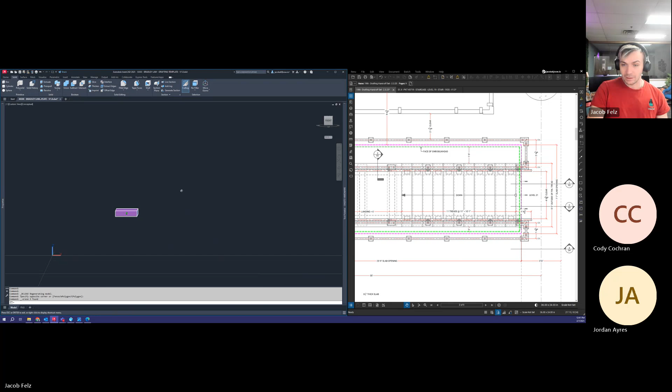All right, if I hit close block editor and save changes to the block, it's going to make a cylinder on every tread. So that's what I was talking about earlier when I was saying if you block your tread and you have to make a change to it, it makes it a lot easier to be able to do that. So I'm going to get rid of that though, because really we don't need that. That was just for fun. So we're going to undo that. I'll get rid of these because we don't need multiples of those right now. Okay.

Cody, how you doing on time over there? Sorry, I want to make sure you're good. I'm all right. I thought it was going to be about 1, but it's looking like maybe more like 1:30. Okay. I'll probably take my lunch when you're having to go, and then I can come back into this too if you guys are ready or want to get back into this later.

But what we can do is work on setting up the treads and where they need to be. We still have to draw in the steel, even though we're not providing it, but we still want to show how that steel interacts with our staircase. So that's why it's important to make sure we draw it in, even though it's not our scope, it's not really our problem, but we still want to make sure that it interacts well with what we're building.

So let's start with, let's see, got a section view of the treads here. All right. Let's assume that we're working on the staircase going from level 20 to 21, which would be this guy here.

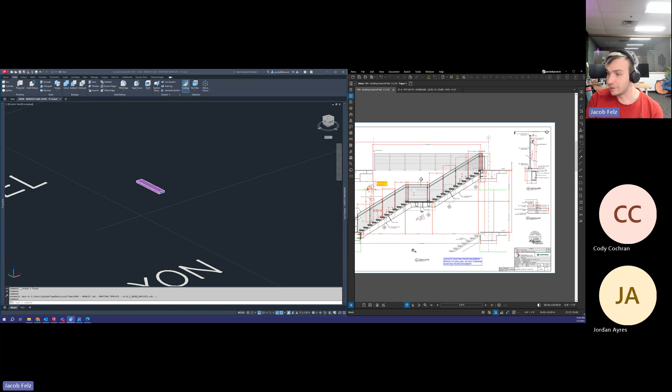I'm trying to avoid level 19 to 20 because there's that planter that's sitting below it right now. And I want to come back to that with you guys when we have a little more time to get through it. So for right now, let's look at this and pretend that this is the only staircase we're working on right now.

So if this here is the first tread or tread number 1, we need to find out, well, here's your dimension here actually. You need to find out how high the next tread is from the face of the tread below. So it looks like every tread is going to be 6 and 9/16 high from the next one. That should be consistent across all of these.

So that is a safety, I think an OSHA standard actually, that your treads all have to be the exact same height from one to the next and the same depth from one to the next as well. If they vary, it will likely cause somebody to trip and fall. So that's why there's safety standards with that. So we want to make sure that we're maintaining those. And as long as the steel vendor has that correct on their drawing, then we should be okay with this.

So assuming that the next tread is 6 and 9/16 up, what we can do is we can draw a line. I'm going to go here. I'm going to draw a line straight up from the corner of my tread, 6 and 9/16, just like that. Okay. So that will designate the height.

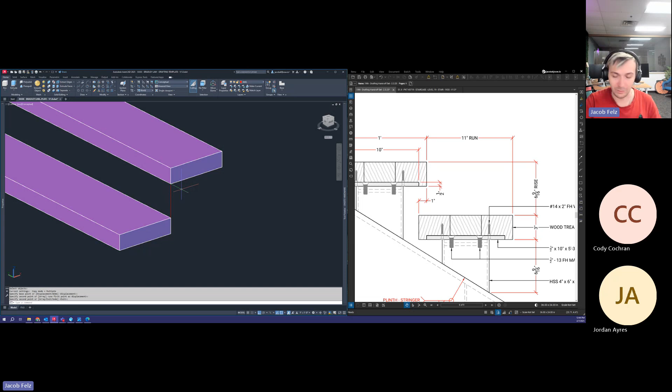So I'm going to use the copy command. I'm going to paste this. Whoops, hold on a minute. I should have actually grabbed that top point because it needs to be there. Meaning that if I did a distance or DI check on it from the top of this tread to the top of this tread, the Z direction should be 6 and 9/16. Forgive me, I don't have that one memorized. 5, 6, 2, 5. Okay, cool. So that is correct. All right.

Now that we have the height correct, we got to get that overlap correct. So looking at it from the side view here, right now, these are perfectly in line with each other. Oops. Well, let me draw a line there. They are perfectly in line with each other if you look at it from the side. So we need to move this tread block 1 inch over to fix that.

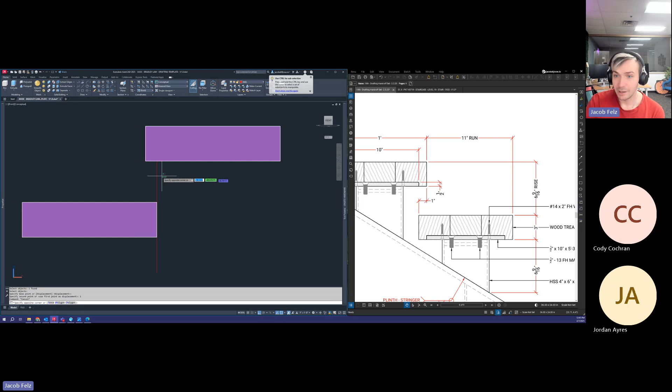So now if I was to check this one more time, I go from here to here. Not only should my Z direction be set at 6 and 9/16, but my X direction is also going to show 1 inch, meaning I have a 1 inch overhang from one tread to the next. So now that we have that, we need to know quantity of how many treads we need to provide for the staircase.

So for this particular part here, they have them labeled, which is really nice. And when we get to actually plotting the staircase, I'm going to show you that I actually do this as well. It's a really good way to double check your work because I have been in similar cases before where I have not labeled my stairs, and, this is going to sound really dumb, but you might end up at a point where maybe you draw your staircase in, but you forget a tread or you add an extra tread by mistake.

And then, in a staircase like this, it's really not a big deal. When you're dealing with something like a big spiral staircase, it becomes a greater issue because then that affects the entire spiral or helix of the staircase. So you got to be really careful about that when you do a circular staircase. But in a case like this, it's really not a huge deal if we end up doing that. But you want to make sure that you try to do your best not to make a mistake like that.

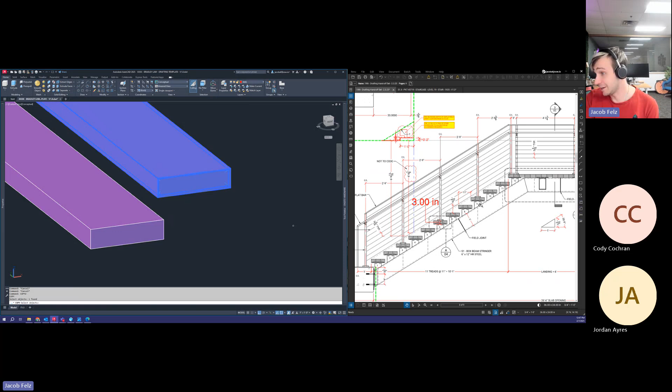So, important notes though: here we got 1, 2, 3, 4, 5, 6, 7, 8, 9, 10, 11 treads, and then the 12th tread, technically, is where the landing is. So we need to copy these so that we have 11 of these treads right now. So I'll do that real quick.

And I'm going to use the COPY command in AutoCAD because it will allow me to select a base point. And what I like to do with that is I'll highlight the tread that's on top, select a base point, meaning I can select like this point here. And then I can use that to kind of chain reaction, copy these throughout like this, make it easier on myself. Got to make sure I'm grabbing the end point.

So right now I have 1, 2, 3, 4, 5 treads. I need to get up to 11. So we're going to go 6, 7, 8, 9, 10, 11 treads. So there's our first 11 treads for our model. So we're already halfway up the first set of stairs. No big deal. All right. We do have to get that landing model in though too. So that'll be the next big thing we're going to work on together.

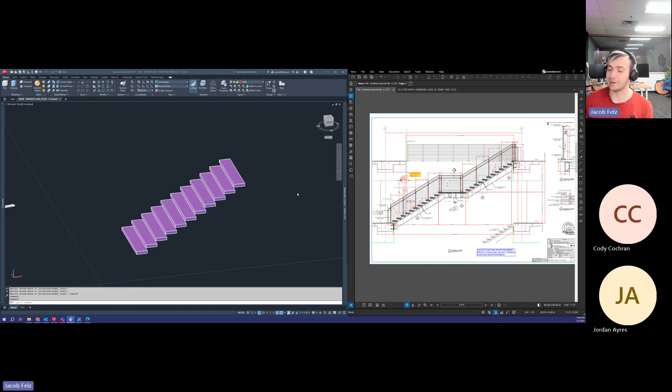All right. So, let me just think real quick. I probably need to go back to where my section view was drawn at the bottom, and go back to what we did with the stair tread. I need to extrude it, do my miters, and then really I don't need to turn it into a block, but I might do it just for fun. And in case maybe the landing is the same from the staircase to the one below, then I could use that block to make sure that they stay the same.

So let's do that. We'll go back down to our section view over here. I go down to my top-down view on my view cube. And something else to take note of too, when you're working between 2D and 3D, generally if you're working on something with 2D lines like this, you want to make sure that you're not in a 3D visual style. So you're going to go up to the top left and switch it back to 2D wireframe.

Why that's important is because if you switch it back to conceptual, actually maybe it's not that noticeable, but it does create some weird glitchiness and it will slow down your computer a little bit when you're dealing with 2D objects and looking at them through a 3D visual state. That doesn't really happen the other way, using a 2D visual state to look at a 3D model, but when you're looking at 2D objects in a 3D visual state like conceptual or realistic, you're going to see some weird stuff. In conceptual, you can see these weird lines and how my dimension turned into this weird hexagon shape. It's just kind of quirky.

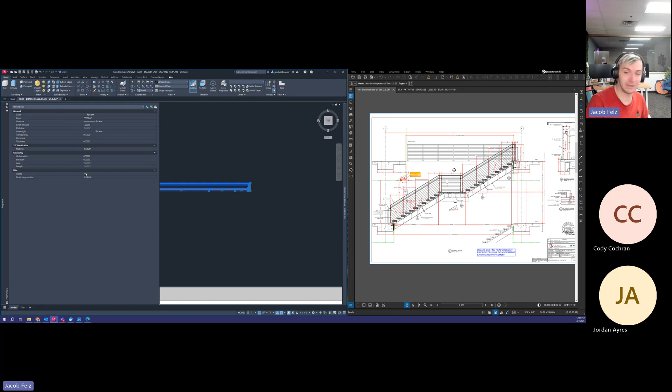So the important thing to remember is when you're making something off of a 2D face into a 3D object, you want to make sure that you're dealing with a polyline and a closed polyline. Anything other than that, you will definitely run into some problems. So just heads up there, make sure that you do check that before you go work in 3D here.

Anyways, like we did previously, we are going to take that landing and we're going to use the extrude command to be able to turn this into a 3D object. We're going to highlight the entire thing. And we're going to tell it, what did we say, that was 65 inches, I believe? Yeah, 65 inches tall or wide. So type in 65 here. And then now we can go back into 3D mode. In 3D, rotate this guy so that way we're facing the correct direction. We're looking at the top of that landing. All right.

I will also save these as well. So I'm going to go ahead and save as, because we are getting deeper into this model. And I want to make sure that if I do have a crash happen to me, that my work is backed up somewhere. If I don't save it right now and it crashes because I'm working in a template, AutoCAD's going to say, sorry, I don't remember what you just did. It's gone. It's like it has amnesia or something. So we're going to save it right now, make sure that we're not working in the template. I should have done that from the start.

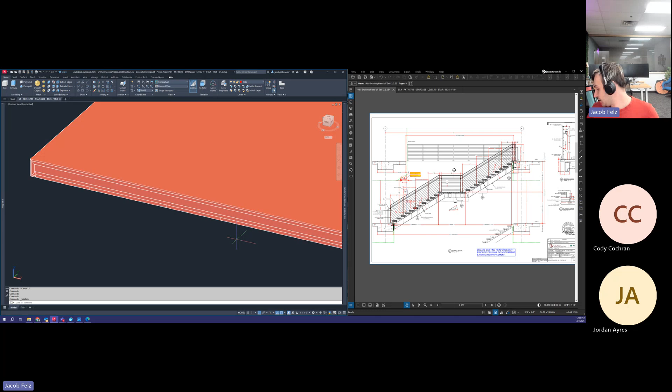Yeah, I'm probably gonna take my lunch, but if you guys are both back on later, we can continue working through this, because we could probably finish the 20 to 21st floor staircase today. We could probably even do 19 through 20 if there's time. But the steel part, I'm probably gonna have to do that next week with you guys, because that's gonna take a little bit longer. But we could at least get all the treads and landings and our scope all situated. All right, I'm saving this again, just to make sure it's actually saved. And then I'll close out of this.